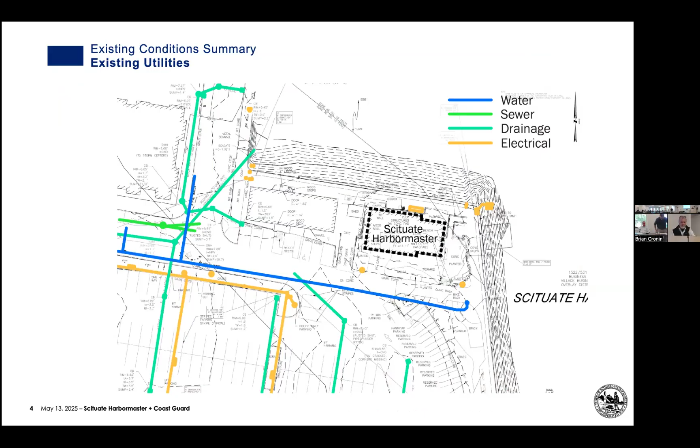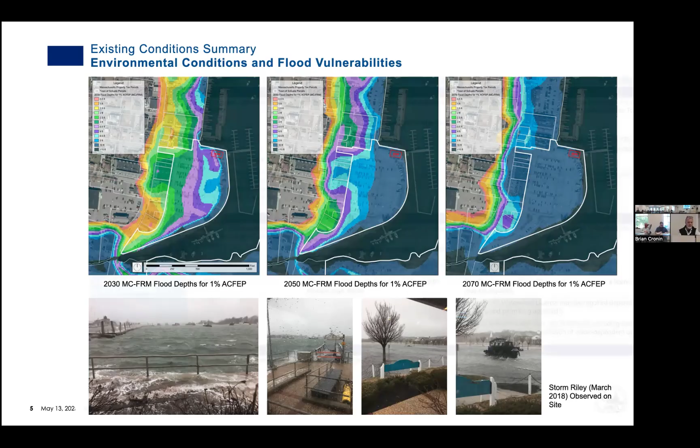Based on that, we developed some parameters for which to design the building. One of the other exercises that Niche did as well is a first pass at what the local, state, and federal permitting would be required for this project. I won't go into that in detail yet, but basically we have an understanding of the building codes, MassDEP and federal EPA regulations that we'll need to submit for permitting.

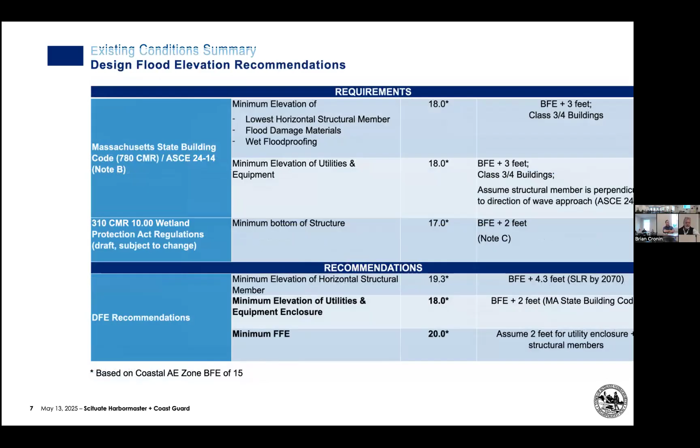The next thing we did together as a team is we looked at the flood elevation and the recommendations. We're at elevation 15, I think, as the starting point. By the time we work up through the underside of structure and utility enclosures, we determined if we're starting at elevation 10, for a ramp or grade around the building, our first floor elevation is elevation 20, which is 10 feet up in the air from the existing grade. So that's where we're starting from.

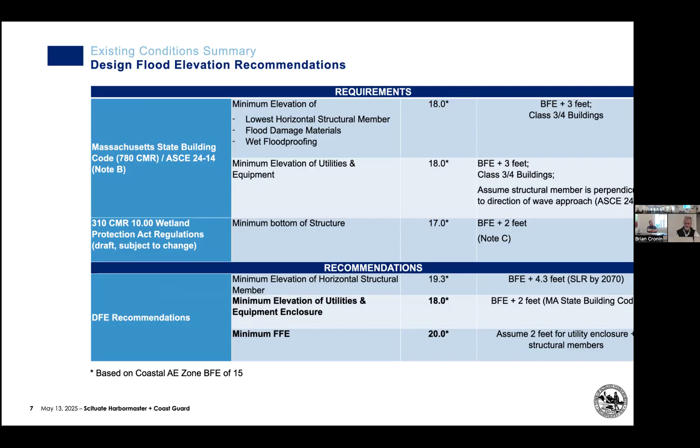So 10 is the grade today, elevation 10 is the grade. The building is actually at elevation 11. Elevation 10, and then it drops to elevation 9 pretty quickly from that.

We talked with the group doing the larger parking lot project, and it sounded like it would be okay to regrade some of that to get to the 10, because every foot of elevation is 12 feet of ramp, so we're trying to minimize that.

One of the other things too, the idea was to raise the building up so we can get as much water under it as possible. But if we had to have some footprint still on the ground, we were making up 2 buildings worth, so we're actually providing more access for water on the site. If we raise the grade, put in a basement or lower level, those things are okay - we're still actually providing more place for the water to go when it does flood.

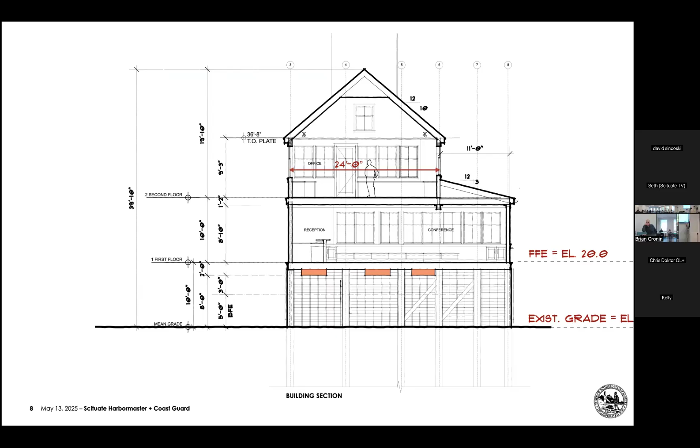So this was the sketch. I think someone had thought it looked like it was broken down last time, but it's a sketch, it's an artist's sketch.

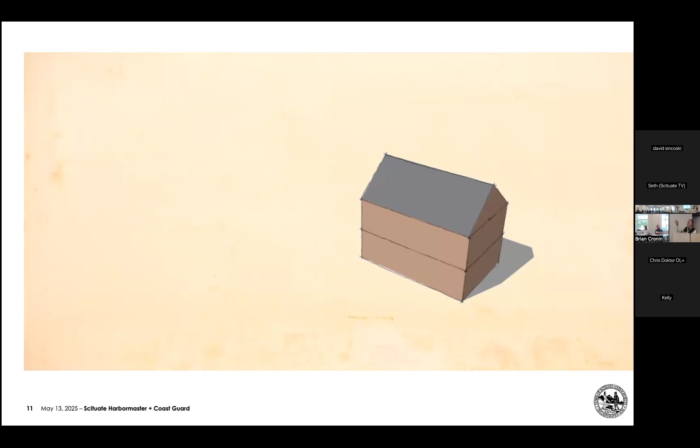So then what I did is I took that module, that 24-foot module, which is this width. And if we go say a 2x3 footprint, so 24 by 36 feet, that's sort of a general model, 2 stories high, 10 in 12 slope. We extended it for the length of the site.

We had some cross gables to give it some articulation. In this case we have 2, because if we're thinking about Harbor Master and Coast Guard, they would each be represented by a cross gable. And then we can articulate them even further if we want, create a little more interest.

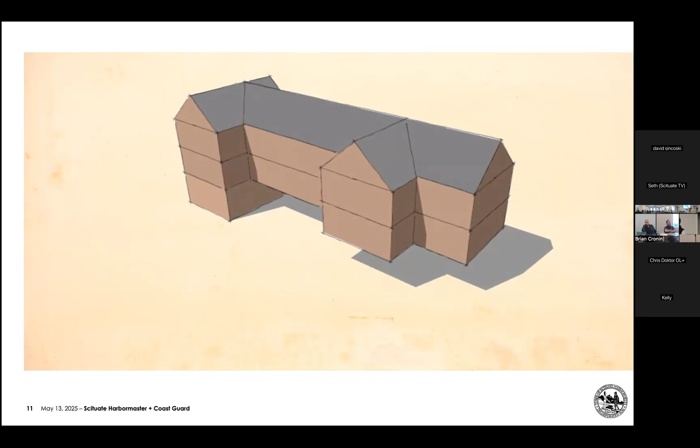Then we raised it up 10 feet. We put a basement in, or lower level - first floor really at 1 level for storage. We had a platform for access, and this was a first pass at a sketch of what that might look like, with basically a series of these simple gables articulated on the platform at 10 feet high.

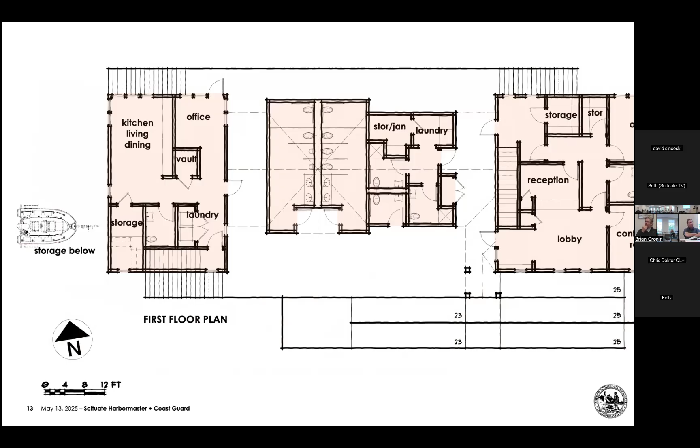I noticed that on the east side facing the harbor, between the comms and the conference room, it looks like you've got two storage closets, and behind those, a bathroom. Is that next wall a full wall or a half wall for people? That's a full wall, so this is private.

I'm with the guys—having the ability to see more of the harbor from that side instead of closet space and a bathroom is a little hard. I would rather have people coming in be able to see the harbor. That was my only thought.

Anybody else? Okay, I'm going to move to the second floor.

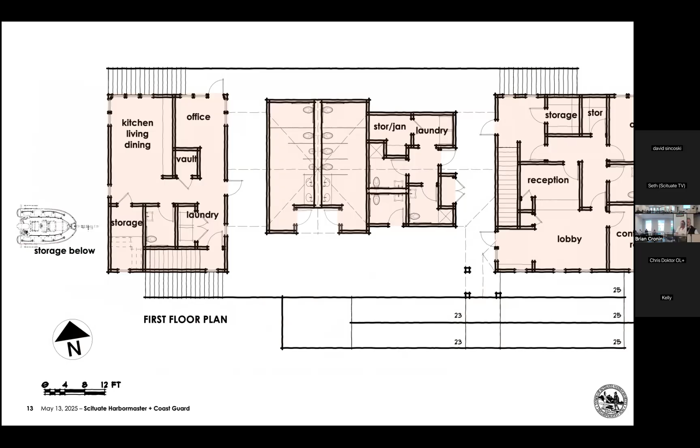If there's none—so three offices, a reception area, a lobby area, and a conference room. Are you on the first floor? Not even all up in the harbor master building. So on the first floor total, two offices—oh, two offices upstairs and a break room, one office downstairs, right? Yep, a reception, a conference room, and the lobby.

A lot of space for three people.

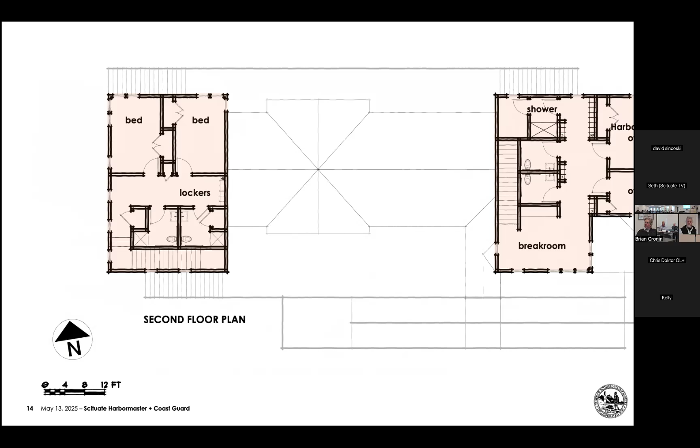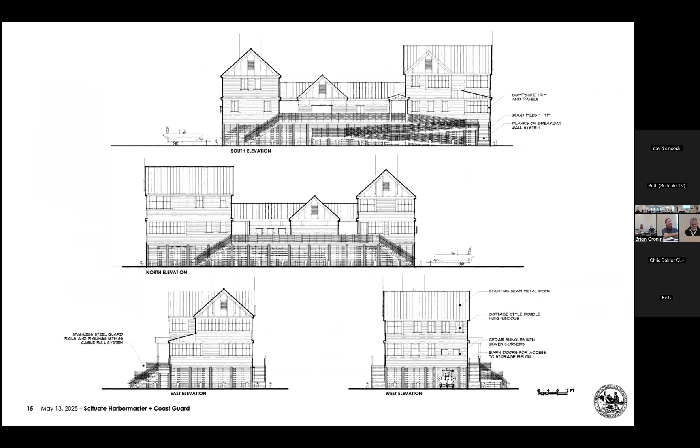When I first saw the concept, it really reminded me of the Mill Wharf, so I like the look that's been presented. So let's see what it looks like in 3D.

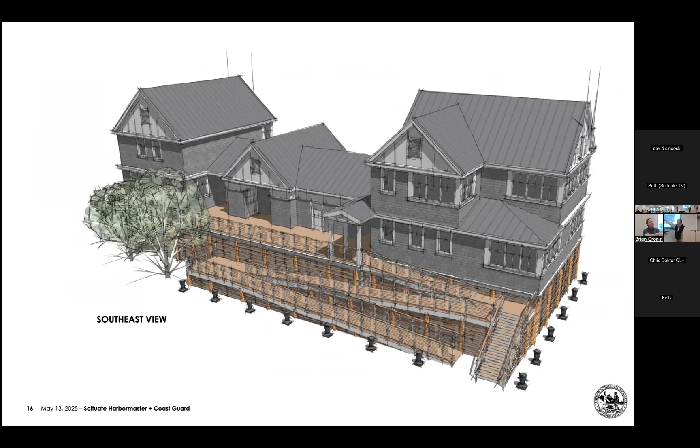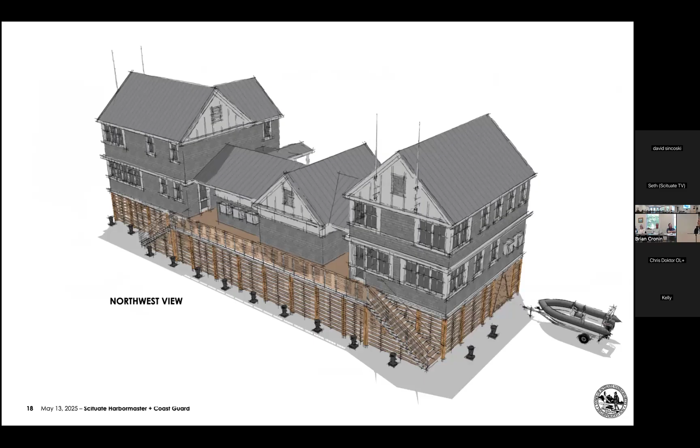If you remember the diagram, you can see the articulated cross gables and the long building. This is facing north. This was just the first pass at how you might have condensing units on the building that don't look out of place necessarily, or like an afterthought.

And this is on the northeast corner, so this is where the communications center is. That's the harbor master's office. So Brian, there's plenty of room to put a crow's nest out there for the office. That didn't seem to catch on.

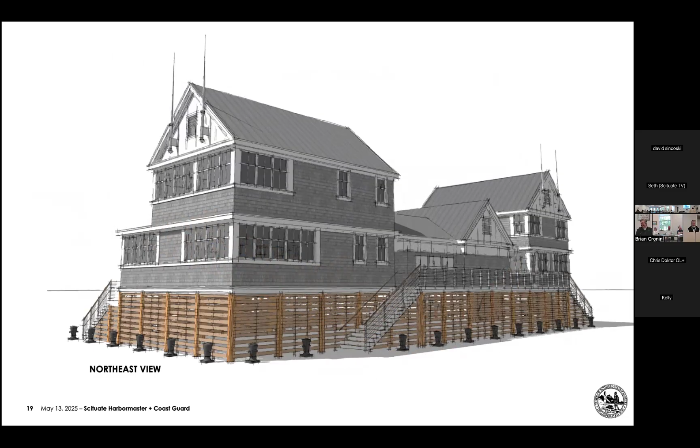Then I added this diagram just for scale. If you're familiar, this is Plymouth, and you can see the difference in scale between Plymouth and Scituate. Of course, the biggest difference in Scituate is the Coast Guard piece of it. If you took that off, it'd be very similar - a little bit bigger, but very similar in scale.

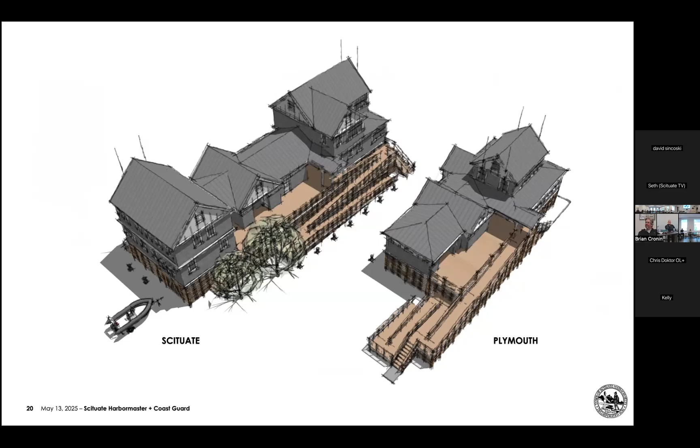So a little bit about the site plan. The landscape architect took a look at existing conditions, identified the existing harbor walk and pathways, and identified a missing pedestrian connection to the harbor walk from downtown. So that was an opportunity.

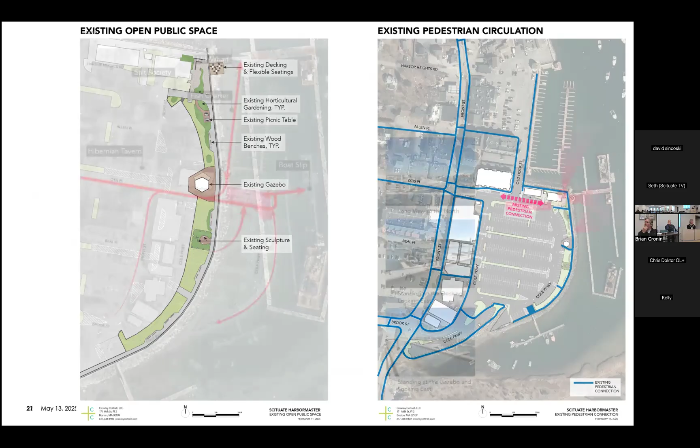Some of the things we looked at were the location of the building, access from town, and access out to the boat slips and the harbor walk, where the preferred views are. Right now the building is pretty far out. There's a FEMA line that runs right at the edge of the building, and if we went forward to that, we'd have to be up another 4 feet. So we want to keep back from that.

The other thing we decided we wanted to try to do is pull the building back as much as we can to open up this corner for the public at grade.

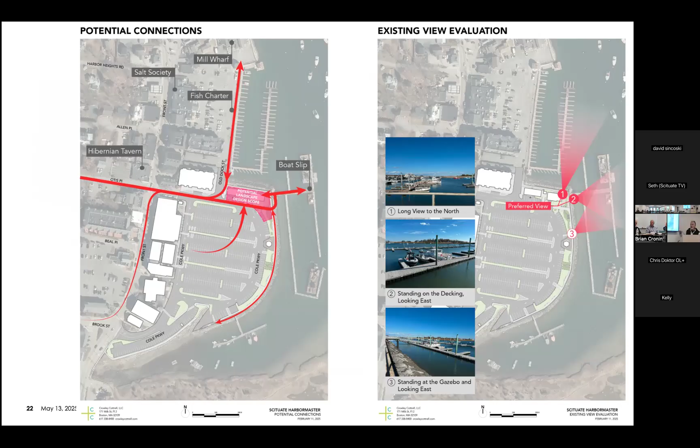So what we did is we pulled it back - I'll go to the landscape plan. So we pulled this, here's that line. If we were on this side, we had to keep this side of the line to keep it at the level of 20 feet, elevation 20. So we put it back. We can keep going, right? We can keep pushing it back.

But the idea is to open this corner up for the public at grade, and you can see where the harbor walk is, and it connects to the ramp and the stairs to get up to that upper level. If you're coming in from town, you can also go up that stair. And it also has the deck on the north side.

There's some reconfiguration of this parking here too, because we lost some parking, so there's some reconfiguration to try and capture at least a couple more spots that we lost at the other end. So I think I heard you say this could be pushed to my left - yeah, a little more.

The anticipated build on this, the earliest date would probably be '28. By my guess, we wouldn't do anything before we receive appropriate grants.

Permitting, et cetera. Is there any consideration to how potentially the FEMA line could change between then and now? Well, as far as we know, it's not gonna change. The 2030 line is set, the 2070 line is set. So between now and 2030 they can change it, but as far as we know, we're still within the 2030 line.

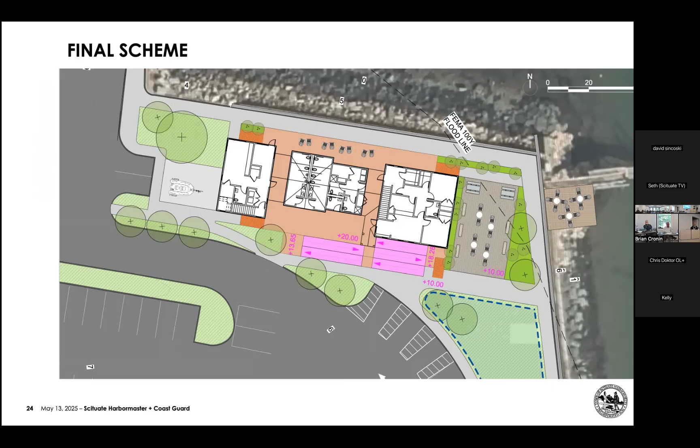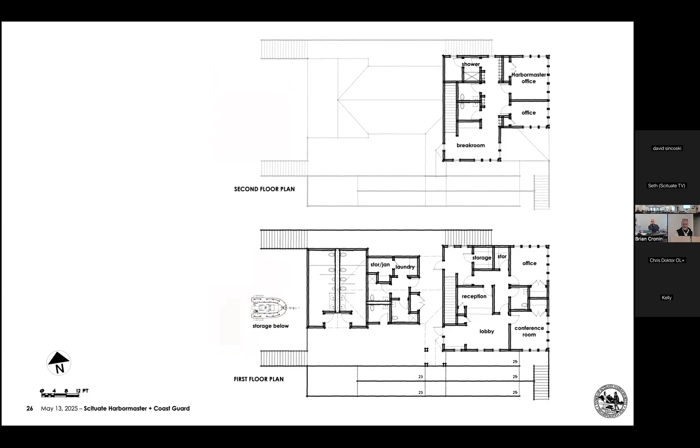So what would it look like if this is the Coast Guard building and we were to decide they weren't gonna be part of the project? They're gonna leave Scituate, so we could simply remove them. And that's what it would look like. So you basically have this up to the bathrooms. And it would be simplified, pretty straightforward. The way it was designed, easily cut that off. And that's maybe what it would look like.

Nice looking building.

So that's that. Now, for costs, what we did as a first exercise, we do have a cost estimator looking at it. You have the numbers back in time. What I did is I took a first pass at looking at what Plymouth cost, because I know that project, and it was $4 million divided by the square footage. I got $1,800 a square foot, but that included site work, building, piles, utilities, emergency generator, included everything. So I took that, figured out a cost per square foot, which is $1,800, escalated it for today's dollars, and then applied it to the square footage of this, and we came to about 10 to 12 million.

And then if we were to take out, Chris, for all three, that's exactly, thank you for that segue. Then, if we were to take out the Coast Guard building, then it was probably 7 to 10, or 7 to 9 for them. Again, order of magnitude, today's dollars, maybe not 2028, so we'd have to add escalation for that.

That makes sense. Maybe we don't need bathrooms.

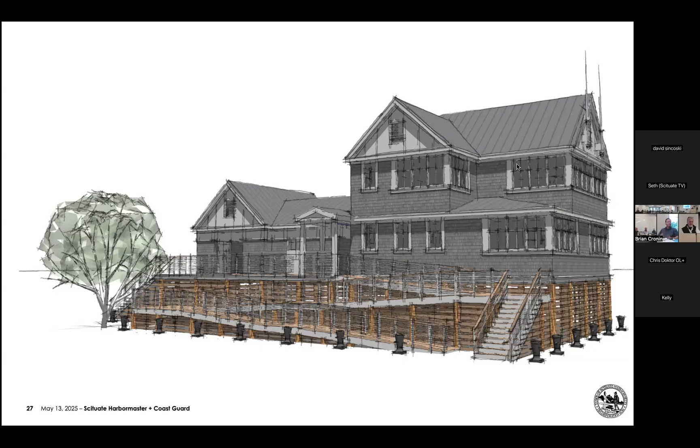Now I'd also like to really thank the feasibility study team for all their hard work, but also for being here tonight, if there were any questions, just to be here, we appreciate it. It's a sizable commitment to what we're trying to accomplish. It's something that we're going to need, so having the ability to really take a good look at planning and deciding how we're going to move forward.

We're taking our time and bringing the right people together to make good decisions for our community. So really appreciate everything that everybody's done on this project.

Have we given you any action items to come back to us with? Was there anything for Chris that we really wanted to see? Did we want to see any different looks on the interior of the building? Was there anything that we were talking about that you want to see changed from what has been presented?

I think we made some suggestions on the floor plan, but I don't know who dictates the floor plan, whether you think they're good ideas and it's easy to incorporate them. I think that would be great, but.

Yeah, I mean, it's interesting. So what I'll say about that is the previous version was more similar to what you're talking about, and there could be several different iterations. I think the purpose of this is feasibility. So the footprint doesn't change, changes beyond this are generally extra. It's the same building, and we can.